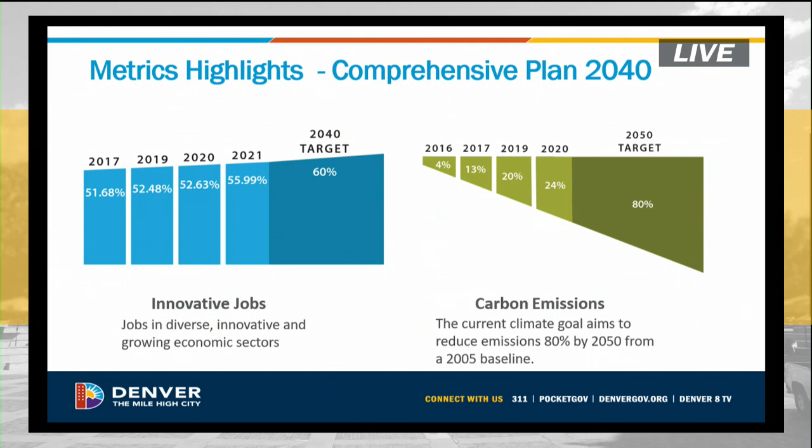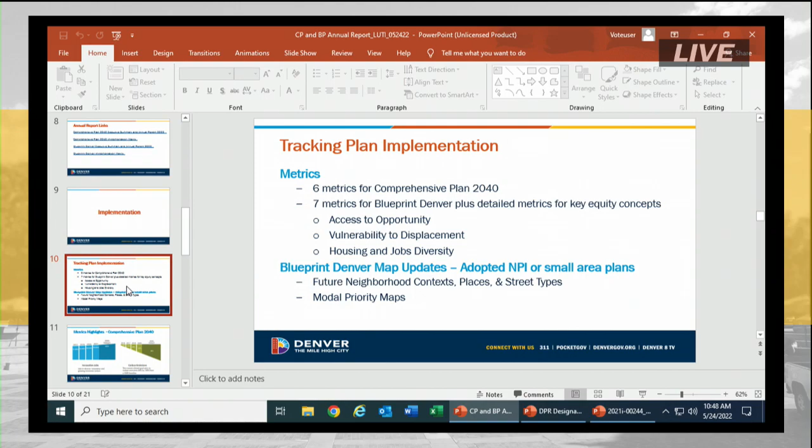So as we're looking at access to opportunity, vulnerability to displacement—the three metrics they just pulled up on the screen—is there a way for us to make a clear determination of exactly what policies the agencies are implementing in order to address those? My specific question is around vulnerability to displacement, because what we see since the adoption of these plans in early 2019 is that vulnerability to displacement has gotten worse, not better.

And there are a lot of reasons for that. I certainly don't mean to suggest that people aren't doing their job or anything like that. We have had an extraordinary pandemic over the last couple of years, but the result is that vulnerability to displacement in particular has gotten worse. Land cost is going up, inflation is going up, people's salaries are not going up.

So I'm curious what exactly the policies are that we are focusing on to address that vulnerability to displacement issue. Sure. And I don't know that you can answer that question, because there are lots of agencies and there's lots of work being done. I just don't see a simple answer to that question, or even a complicated answer to that question.

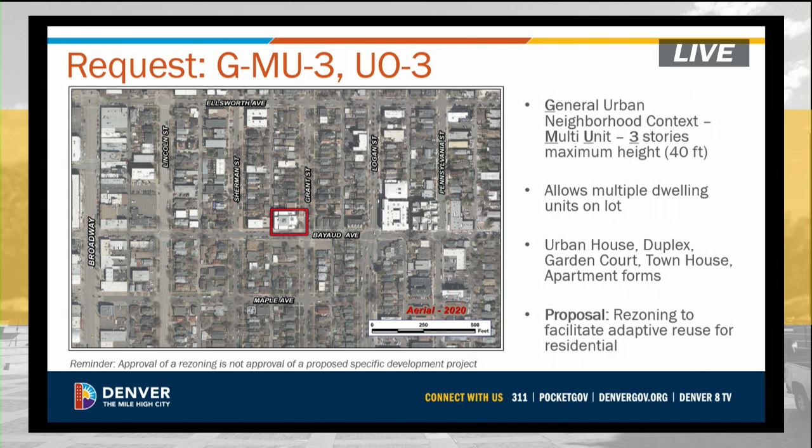Here's a zoomed-in map of the site to give you a sense of its size. This is a 12,000 square foot site, a little over a quarter of an acre, and it's about 95 feet wide on the Grant Street frontage.

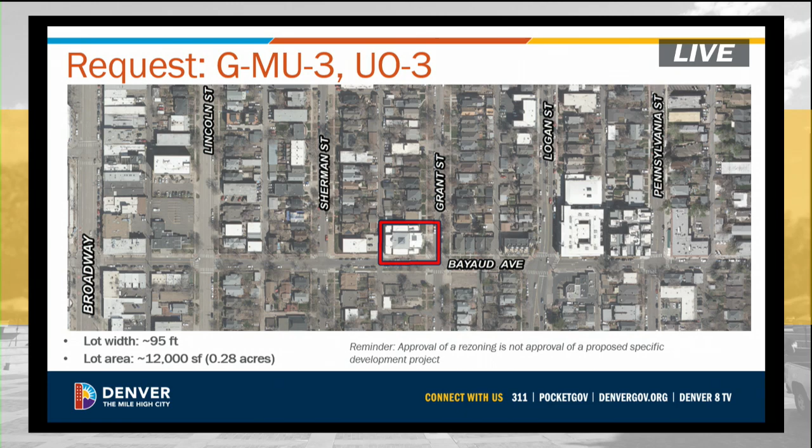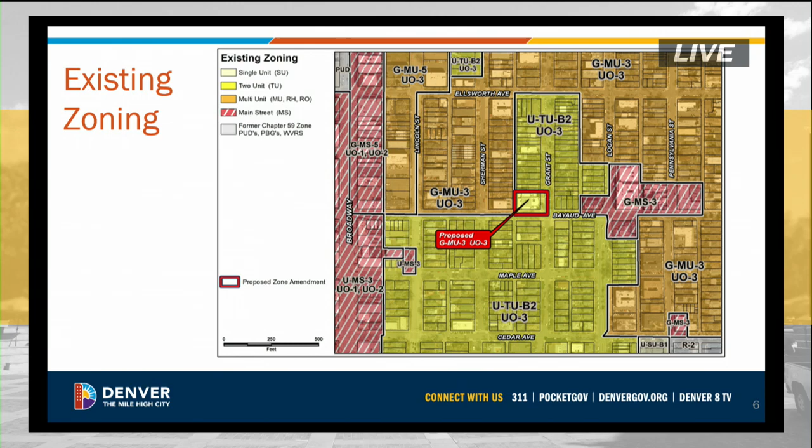Here's a map of the existing zoning. You see it is currently U-TU-B2, but it's kind of surrounded by some other 2-unit zoning as well as general urban multi-unit to the west and off to the northeast. Existing land use on the site is public, quasi-public, and you see a variety of different land uses in the immediate context, and also up and down to the west and east along Bayaud.

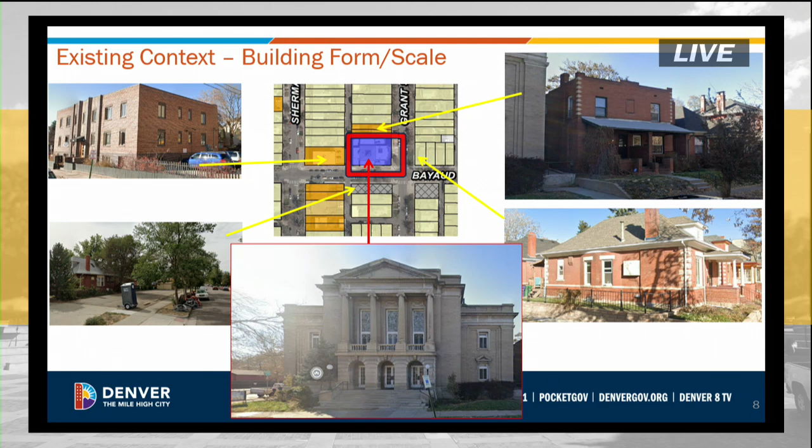Some photographs of the site in the bottom middle, and off to the west you see the multi-unit apartment building across the alley, across the street to the south. You see photos of small surface parking lots on either side of the intersection. On the bottom right is some single-unit traditional development across Grant Street, and immediately to the north is an older 2-unit duplex building.

I want to mention that the applicant has entered into an agreement with Historic Denver, a non-demolition agreement, which would stipulate that the building could not be demoed under that agreement for at least 10 years from the point it was signed. We followed the typical process for rezoning.

We are here at planning board and look ahead to a potential City Council public hearing on July 11th of this year. We received 2 letters of support from the public. I'm mostly excited about the fact that that stipulation was there and that the intention was to keep that building where it was and reuse it for dwelling units.

We heard some concerns both in the planning board hearing testimony, and I also received one more letter after that planning board hearing. It didn't say whether they were opposed or in favor, just voiced some concerns about parking demand that might be generated by the project and how that would impact on-street parking in that area. We didn't receive anything from an official RNO on this one.

Moving to the criteria, we've got consistency with adopted plans. We found that it would be consistent with numerous goals and policies of Comp Plan 2040, just a couple of which are listed here. Moving to Blueprint Denver, we first look at future neighborhood context, which is urban, calling for multi-unit residential embedded in 1-unit and 2-unit residential areas. As a reminder, they're asking for general urban zoning, which is that next level up.

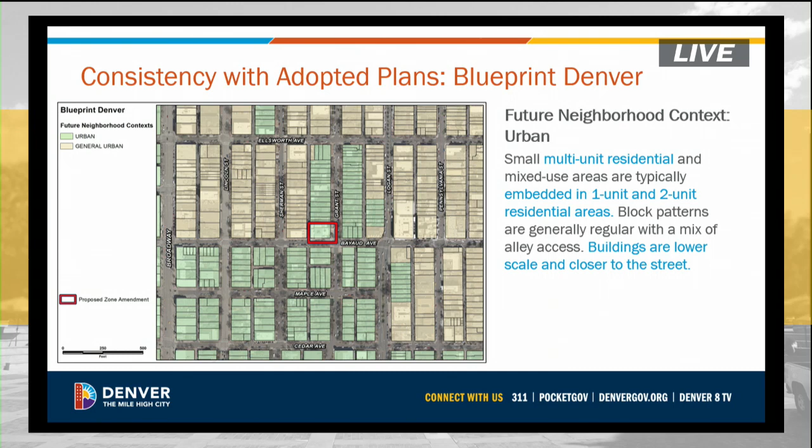You see how the map is kind of right on the edge between a general urban designation and an urban designation. Given that and the objectives for this particular rezoning, with reuse of the existing structure and the agreement the applicant signed onto with Historic Denver, we felt it appropriate to exercise this clause in Blueprint Denver to allow for a little bit more flexibility with how we interpret those designations of future place type or future neighborhood context.

Future place type is low residential, mostly single and 2-unit uses on smaller lots. But you see some of this language that is geared towards providing more flexibility around reuse or redevelopment of existing institutional uses, which this would be one.

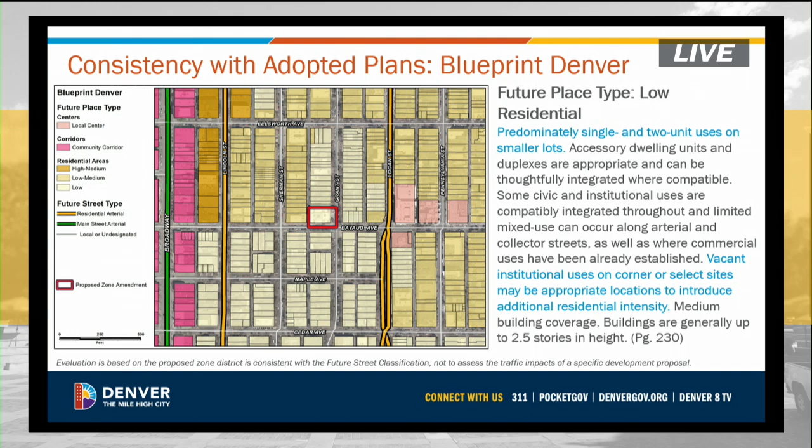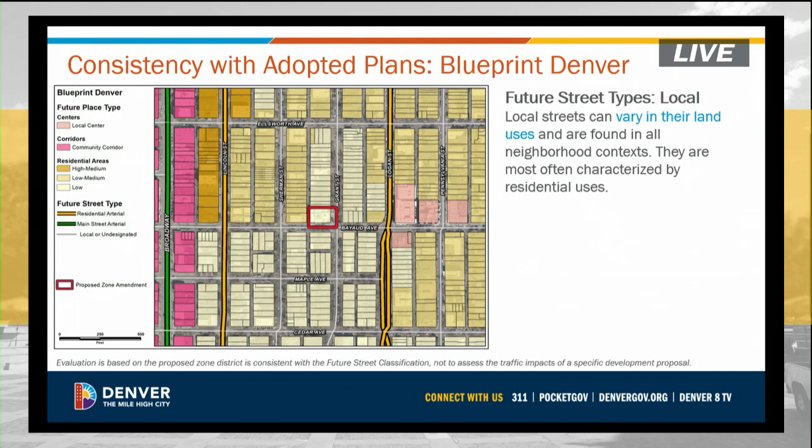Future street type is local undesignated, and Blueprint Denver says the building forms and land uses next to a street like that can be of a wide variety, so we did find that this rezoning would be consistent with future street type.

Growth area strategy designation is all other areas of the city, meaning all properties with that designation collectively are intended to accommodate 10% of new jobs and 20% of new housing through 2040. Given that this would increase the potential dwelling units on the site, we found it consistent with growth area strategy.

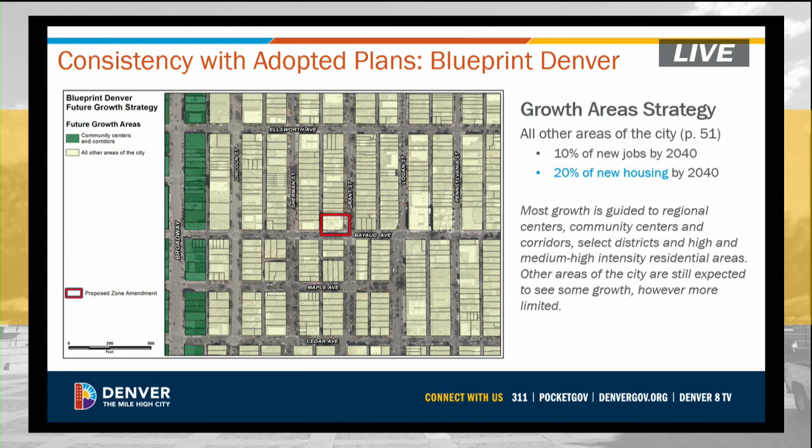We also found that the rezoning would result in uniform district regulations and further the public health, safety, and welfare of the community through implementation of our adopted plans. For justifying circumstances, again, look to that encouragement in Blueprint Denver that says it's a good thing to be a little more flexible about rezoning for an institutional site like this that might be vacated, which is the case here. The building is currently vacant.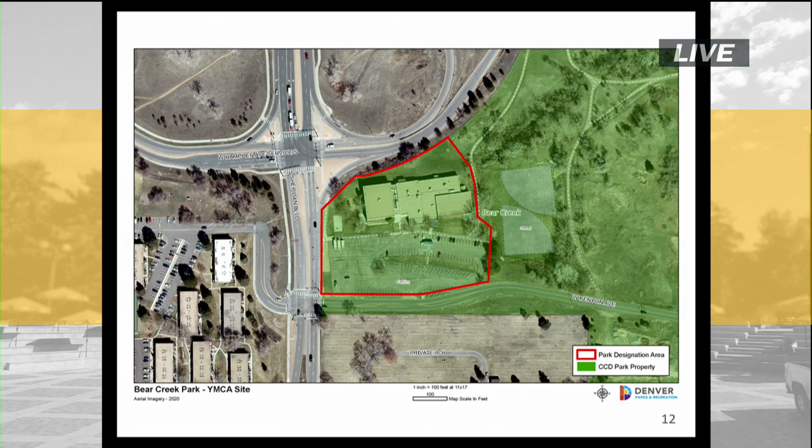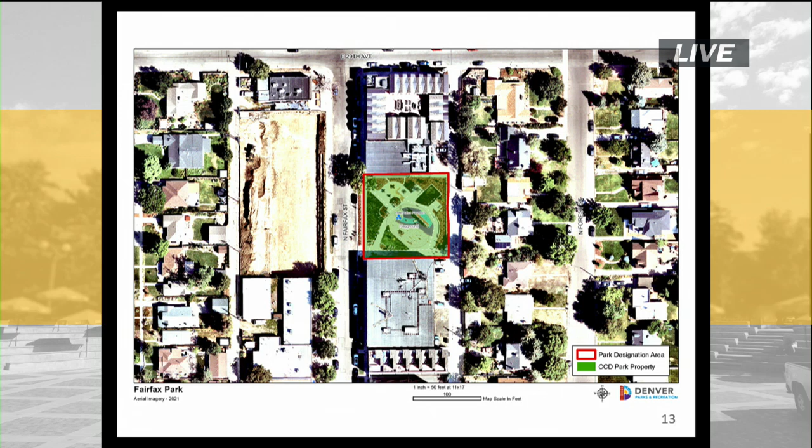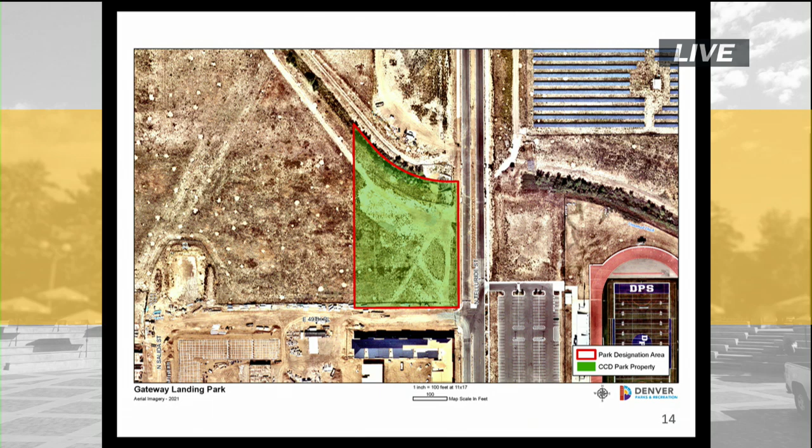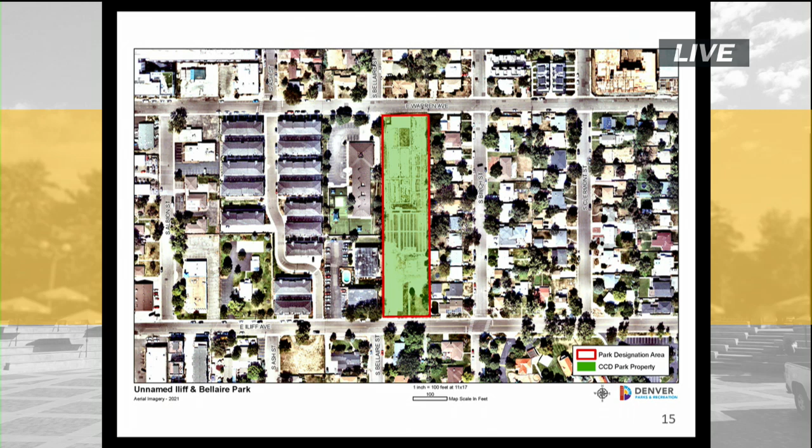So we were looking at this area, and this is actually the ground cover nursery that was in this community. They had gotten quite a few offers to buy this property by developers, and they did not sell. And lo and behold, the parks team reached out to ground cover, and they were like, that fits with what we'd like to see this site become. So this is moving forward this year with a master plan, and we will designate it because it will be a park that this community can enjoy forever as a designated park. So thank you, Councilwoman Black.

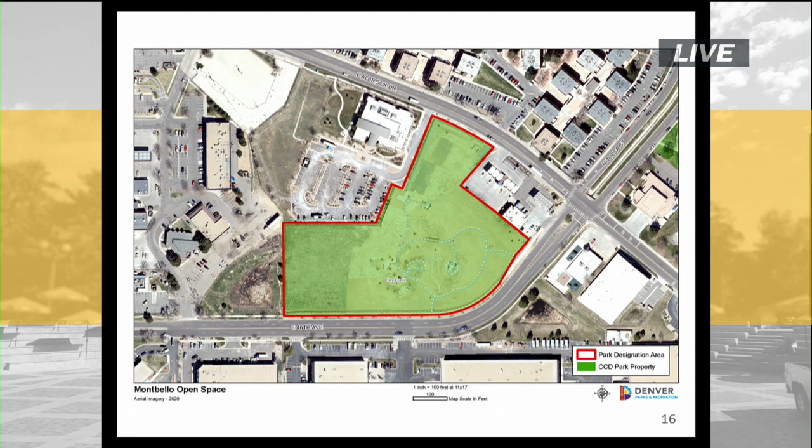These next two are great examples of partnerships with nonprofits. This one is the Montbello Open Space, a 5.5 acre parcel that was acquired through Environmental Learning for Kids, or ELK for short, working with the Trust for Public Land. They were able to acquire this 5.5 acre site in the heart of Montbello. This site is now probably one of the most spectacular nature parks in the country. At this time, there's an education center being built, and we are moving forward with designating this park. This is a partnership with Environmental Learning for Kids, and it has been hugely successful and is a national model to work with nonprofits.

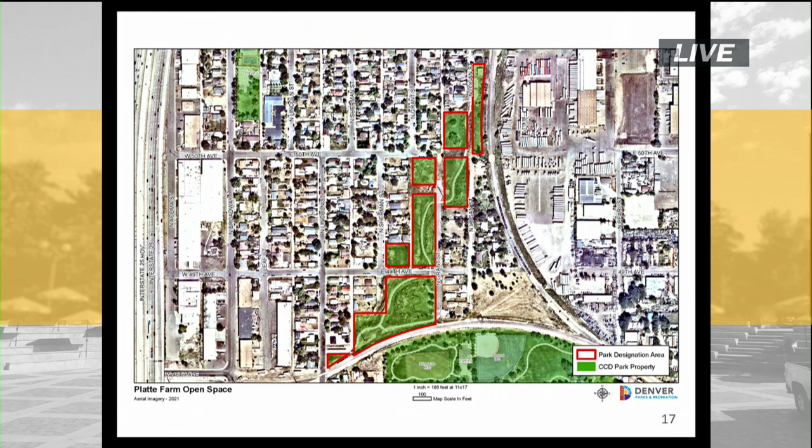The next one is similar. This is Platte Farm Open Space, a series of parcels that some of them were owned by Xcel and others, and we have worked with Groundwork Denver to create a beautiful open space on these parcels that takes you through the community. It is adjacent to Argo, and it has become a very beautiful open space for this community too. So we are moving forward with designation of these parcels as the Platte Farm Open Space.

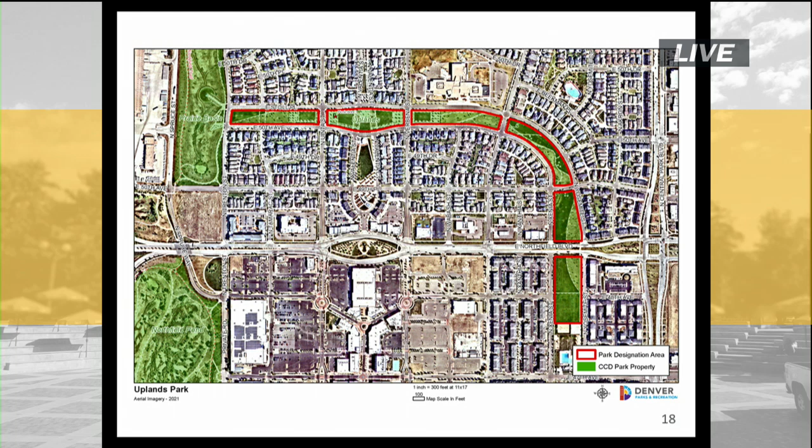This one is in the Central Park neighborhood. These are parcels that are part of the Uplands Park. This is another partnership with a developer that was originally Forest City, now Brookfield. There was a requirement to create a certain amount of open space, so Brookfield at this point is building out these parks, and after they hold them for a couple years, we make sure they're up to park standards, growing in well, beautiful public spaces. They are turned over to the City and County of Denver, and once they are turned over to our ownership, we are able to designate them. So that is what these Uplands parks are.

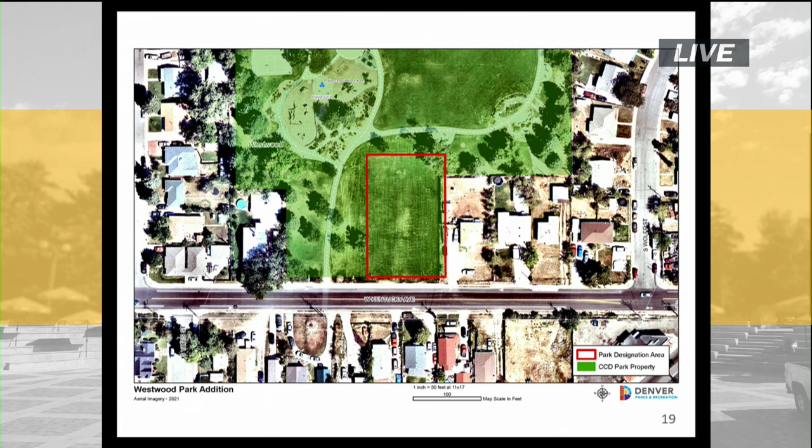So we are requesting approval of park designation of all the ones I've gone through. Like I said, this is very exciting. This process continues on, and I believe, are there any questions or comments?

The one thing I did want to mention is I will provide you, after this afternoon, a list of all the park designations by each one. We have designated over 70 parcels in this city during this process. We will also send you a list of those acquisitions I mentioned, the 1,236 acres that we have acquired. I'll send you those two lists just so you have that information. So if you have any questions, you can follow up with me, and I'll provide you with any follow-ups. So any questions or comments?